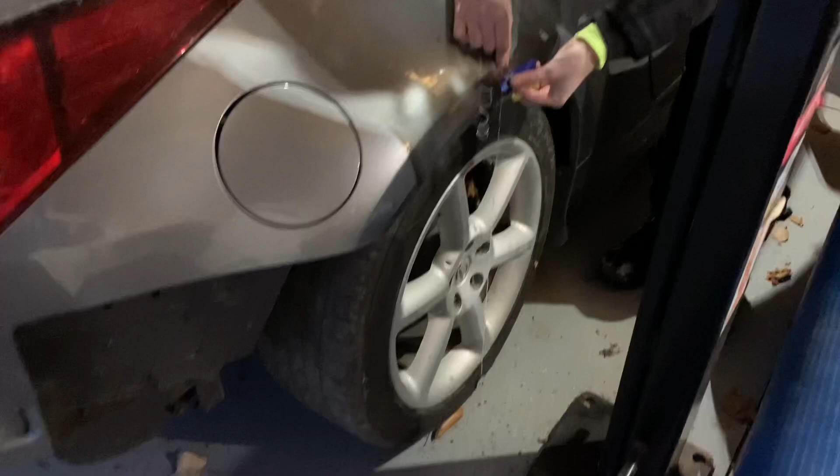Sometimes the surface area of the wing has to fall under a certain surface area. These rules are usually not that complicated and are a good starting point. You can then either Google the width of your car, or you can drop a chalk plumb line to the ground and outline it with a piece of chalk and measure off the ground.

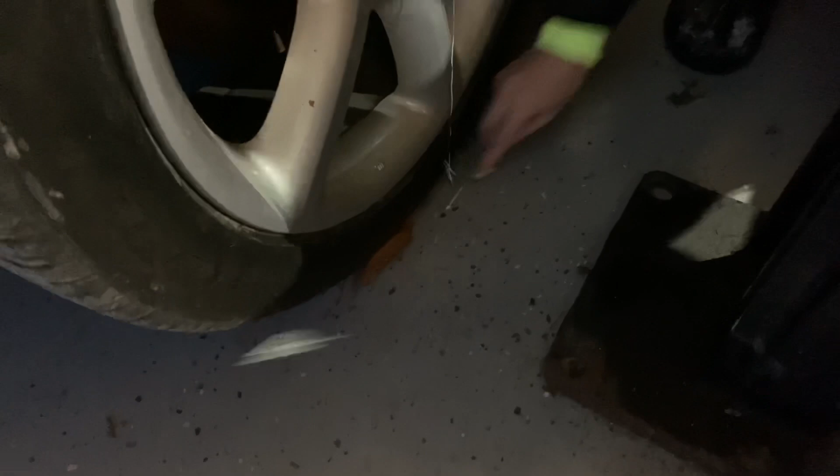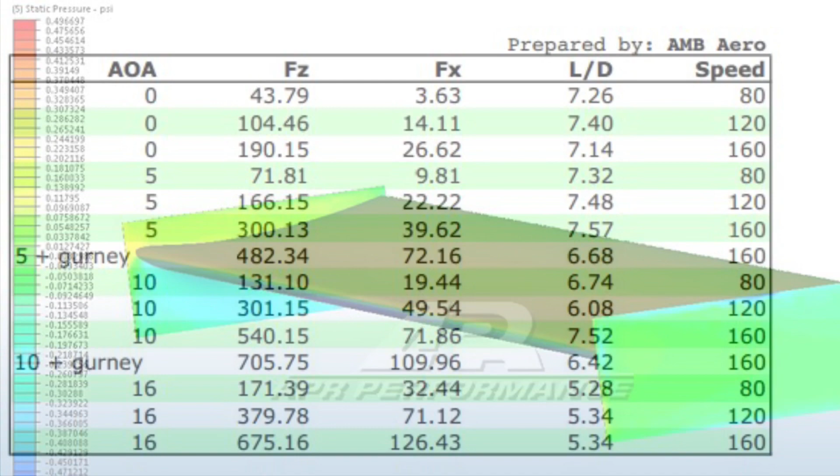If you're going to purchase a ready-made wing, nothing is perfect, but look for a company that has some lift-to-drag ratio and CFD data available. This is the shortcoming of some of the popular wing companies like Battle Aero and Big Country Labs, in my opinion. They may list that their wings are tested for durability or that they make downforce, but there's nothing listed on drag. If you want to go fast, drag is very important.

And if you hop on any of the Facebook groups, especially the general groups, and say, I'm looking for a wing, most of what gets suggested is Big Country Labs wings and Battle Aero wings. And it's just because people don't know better.

Drifters are the one exception to this rule. It used to be very common to see drift cars running GT wings, but they were mostly being run in yaw and stall. They seemed to be mostly on the car to look cool. Some series banned the wings for safety reasons. Aerodynamics doesn't seem to have been optimized in drifting yet.

So if you are attaching a wing to a smoke machine that would get smashed up, you're likely going to pick something cheap that looks cool and won't break. And we all know how drifters are extremely influential in what show cars find fashionable.

Remember, kids, any machine is a smoke machine if you operate it wrong enough. I'm just kidding, and I'm not judging either. I just like to go fast. But if I could pick up drifting as a hobby and for the laughs, I totally would.

So some wings I considered were APR, 9 Lives Racing, and a local company called Space Sport. In the end, I picked APR on its 7.5:1 lift-to-drag ratio, and it was a known quantity to me, and it was lighter than the 9 Lives Racing wing. However, 9 Lives is one of the cheapest wings I've seen that offers some lift-to-drag CFD data. So at least they're designing their wings on a computer and trying to give you an efficient product.

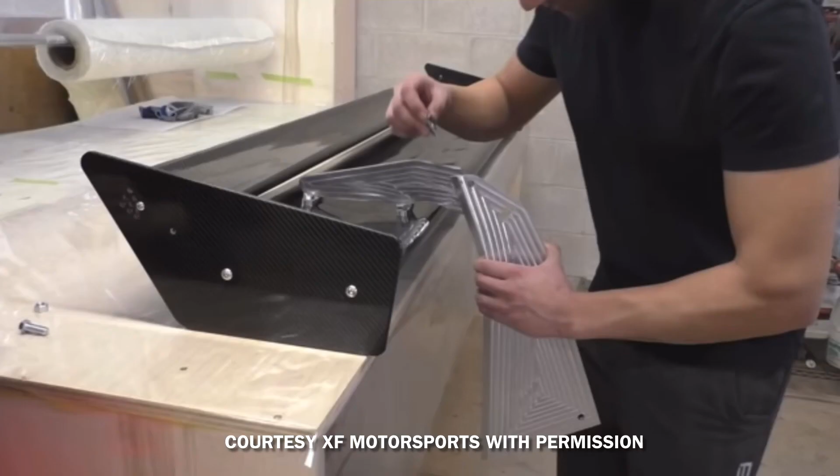Some people make their own wings. I follow a channel called XF Motorsports. He just posted about making his own wing a few days ago. You can check that out if you want. If there was a guy that was as passionate about building cars as I was about driving cars, he seems to be one of the guys with one of the best YouTube channels.

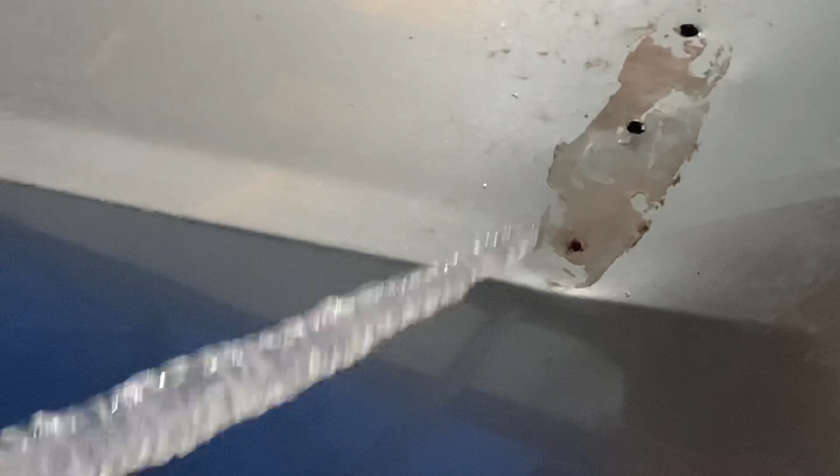If you remember back to one of my first videos of this season, my stock steel hatch was dented from driving at high speed with my past APR wing. To keep the new APR wing from instantly destroying the new Seibon carbon fiber hatch, I'm going to be taking all of this to Levine Motorsports in Kitchener, Ontario, to start the more extensive modifications for the year. That includes chassis mounting this wing to prevent that from happening. If you've ever seen a GT wing rip off a car at 200 kilometers an hour, it's not cool.

So the last thing I'm going to be doing is making sure that APR sent me the correct uprights. These wings are made generic, and then they sent different adjustable billet aluminum uprights that match specific car applications. The first wing I ever got from APR in 2012 had the wrong uprights included, and I could not get any of the proper angles of attack.

Ironically, I went out to try and test fit my wing, and I realized I had to bring my wife out to take pictures because for the second time in a row, nearly 9 years apart, APR sent the incorrect uprights. Notice how what is supposed to be the 0 degrees angle of attack setting is getting ready for takeoff.

So I am writing APR and asking for them to send me the correct uprights as soon as possible. Last time they did this, they just drop shipped me some new uprights without any question. I just had to send a picture that they were wrong, so it didn't end up being a big deal. I hope this is resolved quickly this time.

So I usually finish my videos with some accounting. What did things cost so far? But then I wonder, am I being classless? Do people even care? I'm not sure.